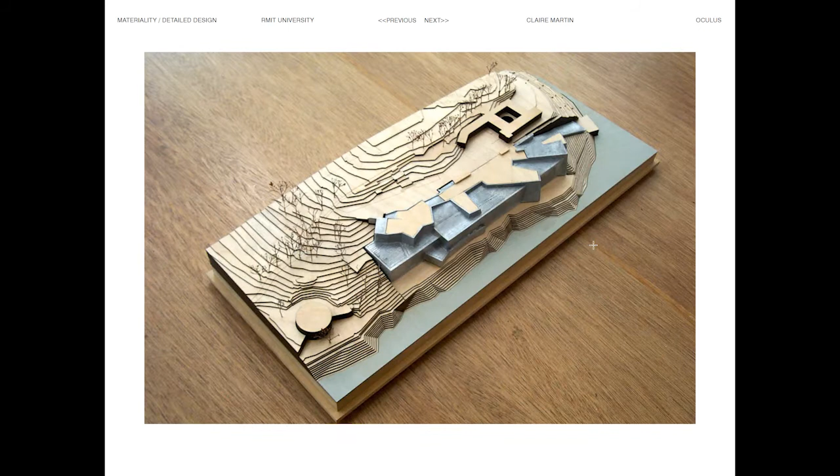I think in this instance, using monochromatic materials is about actually reinforcing the space and the relationship between the elements, not about saying that we will do everything in timber. So the choice of materials can be often about what you're intending to not communicate, as much as what you are communicating. There's a neutrality to the monochromatic way that we model that puts the emphasis on the spaces in between and not actually the objects themselves.

Just to show a scale, we did lots of these small scale models. I noticed that was at 1 to 10, so we'll do models 1 to 10 up to 1 to 1,000. We've done entire models of Docklands that we've had to design tables for. We've worked across lots of different scales, and obviously when you scale up your model making, you have to consider or reconsider the materials that you use.

You can see these are all quite neutral and they're quite rough as well. They're not really intended to be finished models. They're working models and they're detail models.

I also wanted to emphasize the importance of the materiality of site. It's easy, especially when you have a very accelerated pace to projects, to forget elements of the site, but it's really important to understand the materiality of the site you're working in. That's often to do with whether you're trying to better contextualize a building, extend an existing landscape condition, or actually use the materials that are locally sourced.

If you are doing concrete, if you are specifying paving, those materials should and will be brought from close to that area. Therefore, the materials that you're working with should reflect the places that you are working in, unless you are trying to do something deliberately dissonant, but that would be something you'd probably do as a one-off aspect and not everything. It's a pragmatic aspect, but it's also an important way of creating a sense of place.

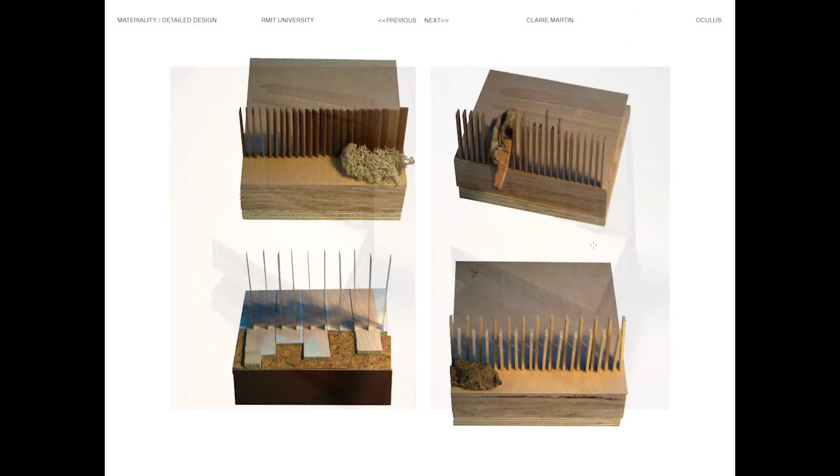These are more about, I guess, material testing, but it was more to do with scale models. These are models for the balustrades that were actually documented by FKA, but that we interrogated in order to see what the limitations structurally of the materials were, to help frame views and try and dissolve the boundaries as you look out over the water near Berriedale.

Again, using really simple and affordable materials like cork, monochromatic things, cardboard. These are looking at the ways that we could start to define the setup for the planting on the green roof.

We'll sometimes use Photoshop or Illustrator to actually overlay over physical models. I think the beauty of having invested time in a physical model is that you can photograph it in many ways and you can manipulate it in many ways.

You can cast light in different ways. Having a model is good because you take it to a meeting and people can get around it and get into the space. But it's also important to curate views of your model to actually convey what you want people to see, which is not always what they will see if it's left on a table.

It's a great opportunity to curate and perhaps use post-production techniques to alter those models. We used, I think the themes around Mona were sex and death. So we used the Egyptian Book of the Dead barcode, an abstract idea, to work out how to initially sow or set the planting, establishing the original grid for the green roof. That wasn't important for people to know, but it was important for us to have an organising device that was quite regimented and had a thematic reference back to the broader theme of the museum.

We were also using the fact that plant material doesn't always perform in the way you anticipate, and will eventually do its own thing. For us that was a vaguely interesting idea at that point. It looks more established now, but it's quite free range and a lot of the sedums have receded.

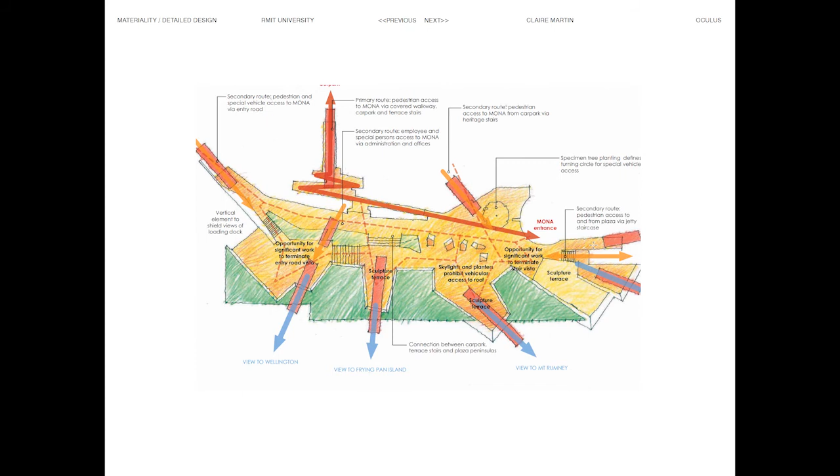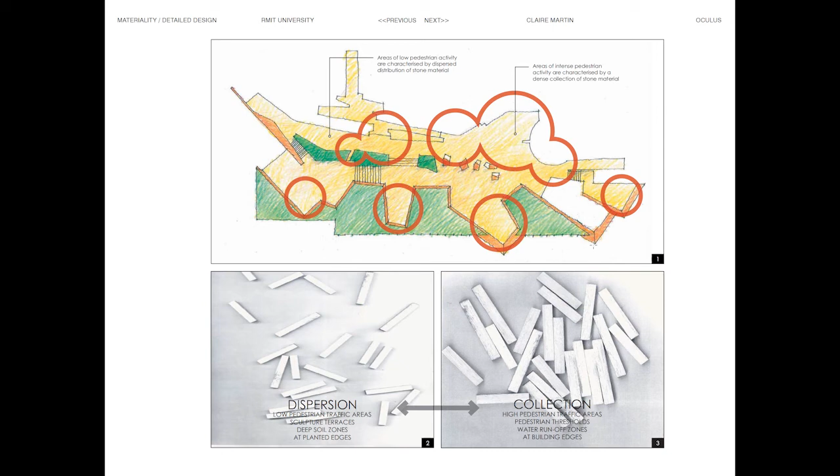The idea was trying to create points of intensity in what was essentially an open field condition. These are probably 30 centimetres by 30 centimetres, very small scale models that can be picked up and played with, but actually started to show how the material would perform. In this instance, say it's timber and plaster.

There are certain things about whether you can cast plaster between those elements that relate to whether you could cast concrete between those elements. We're not saying it's exactly the same, but there are certain performance aspects that would be quite similar in how we tested in that instance.

These were also about a similar size, but this is where, as part of your detail design work, you'd specify that you want samples produced, and those samples actually ended up proving that we were totally wrong and couldn't do what we wanted to do.

The idea was, this is some of the site source sandstone that ended up being too soft and broke. The idea was originally to have that integrated into the plaza, and then that was another local source stone that also didn't really perform as we anticipated. There would have also been lots of tripping issues, so it was good to test at a very small scale and then at a one-to-one prototype scale, as you were just discussing.

This was a model, not a particularly attractive model, but a useful one in that the element that's a sandy red colour in the middle was actually an insert. We had a base model that we could then insert different paving options into, which became quite a useful iterative tool. And then we looked at how we could create that idea of collection and dispersion.

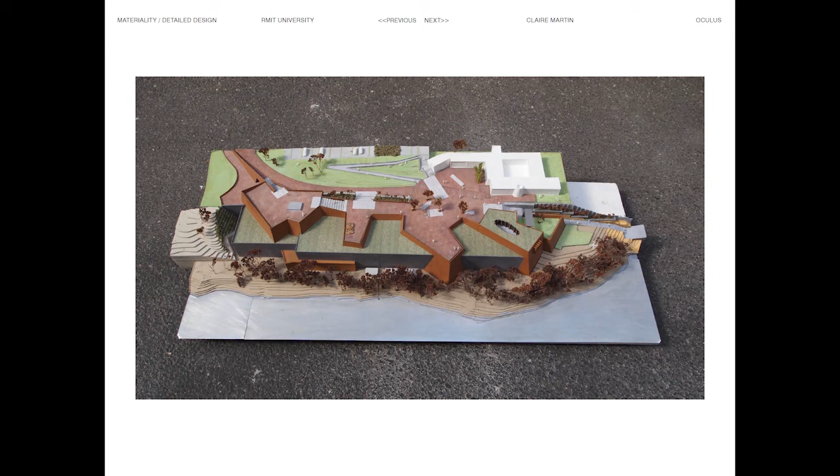These are literally cut out, inserted into the model, photographed, then pulled out and replaced with others. A pretty straightforward task, but at the same time we were doing that, we were also looking at it in one-to-one scale and understanding how it would perform and whether it would achieve what we wanted.

When you're looking at materiality, certainly in a ground plane condition, you need to think about reflectivity and the environmental implications of using light reflective surfaces, which in some instances can be really good and in some instances really bad if they're adjacent to buildings, for example.

I think we thought it seemed like a good idea at the time in terms of colour and change, and we ran through slides showing the idea of having pads that could preempt some of the artwork locations or congregation points. So we took him through all of that.

At the end of that, it really just kind of... you can see how many of these we did to test. At the end of the day, it's going to be a $3 or $4 million landscape, so obviously doing iterative testing at this scale is much better than building it and then seeing it doesn't work. Strangely, it's good for business as well.

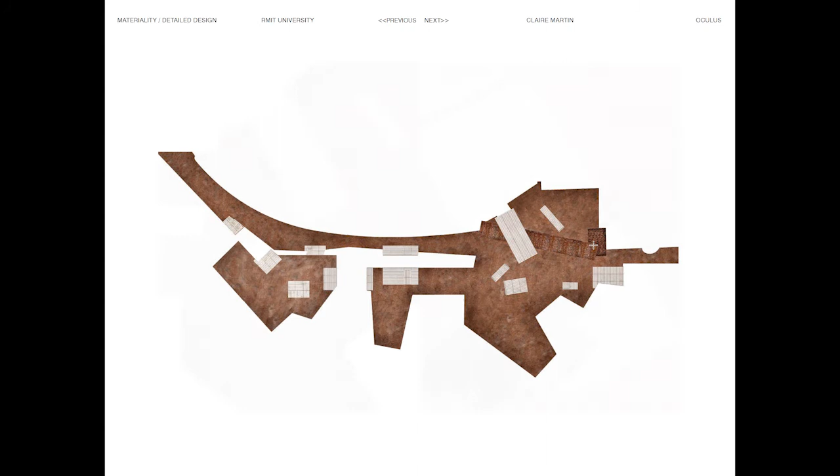I think he basically saw the red brick and decided that material reminded him of clay court tennis. He really likes clay court tennis, he likes tennis, and that's why now the plaza has a tennis court on it and doesn't have any of our ideas on it.

So I'm showing you that because there we have it. I think you just have to be careful when you bring people into your office. But yes, there's something that resonated with him about that materiality, and he made a totally different connection with it, which is ultimately a lot to do with our spatial intelligence. We draw on what we know from our childhood, what we enjoy, what we like, and his understanding of that was very different to ours. But at the end of the day, he does play tennis there, and I think it's quite a playful thing.

Ultimately, this project, whilst it's a very public project, is actually the biggest private gallery in Australia, and that's ultimately one of his homes as well.

This slide was referring back to the life, death and sex idea within the gallery. So again, just talking about plant materials. I think the plant material is reasonably subtle and not overly extensive, at least in the plaza. But the idea was using plant material that resonated with evergreen, the idea of everlasting, or the idea of cemeteries and memorials, which often use that type of planting. So it was understanding that plant material can have its own symbolism, often to do with colour and change.

So there are cherries throughout the plaza and the stair, which is to do with spring.

These pictures show an open lawn condition, essentially a park, almost like an urban parkland setting, although the entire NGV garden is on a suspended rooftop. So it is a very successful green roof. And then some of the sculptures that were there. I think it was a very restrained and pared back material palette, which complements the pared back nature of the facade.

So I think when we got involved, these are the structural drawings which show where you could actually locate trees within those green blocks. Lots of structural constraints. So all of the trees that you see there are on structures—some are in containerized tanking, and some in shallow profiles and build up.

These are the original Arup, Sinatra Murphy, the original landscape architects who worked on the renovation, which was in the early 2000s. These interesting figures show lots of hedges. I think a lot of our work is either about stopping things being built, getting things built, or sometimes it's about removing things as uses change.

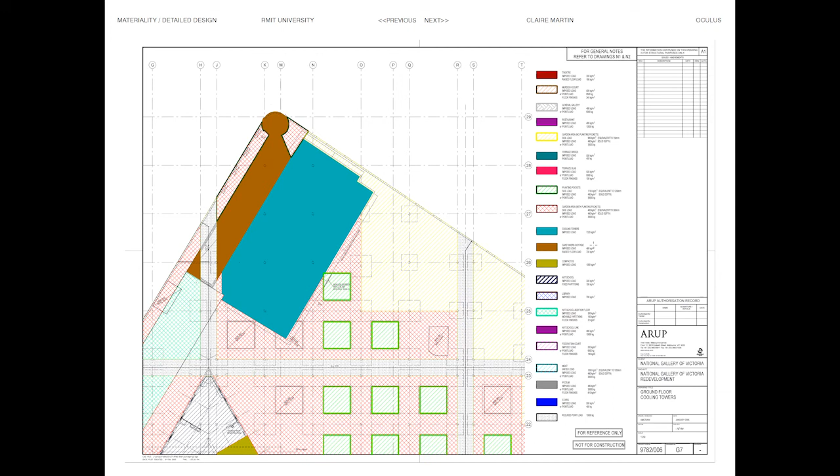These are very early sketches, but the first observation was understanding that the materiality of the forecourt outside the Great Hall actually prevented people from going outside. So I think we came up with the idea of putting down that synthetic turf that's there now, which was meant to be temporary, but like many temporary things, has not gone yet.

The idea was that sometimes that space is perfect functionally, but it's so glary that it actually stopped people going out. So you need to understand the power of material properties and that they can actually prevent use, which in that instance was obviously a problem.

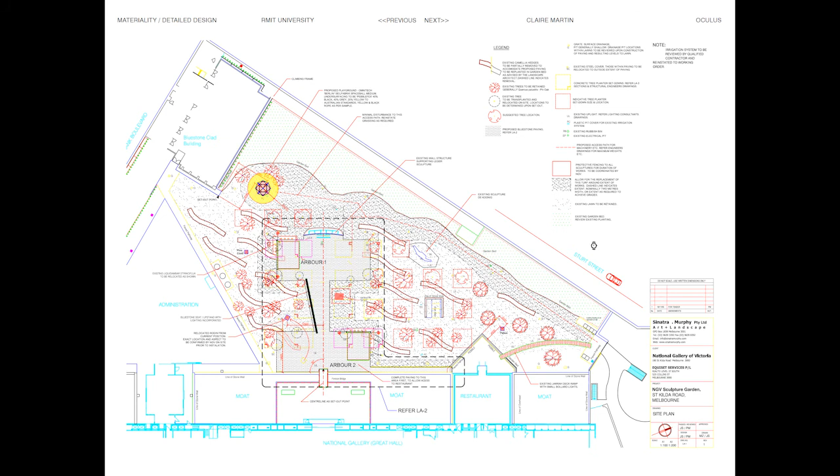These are just really early, very simple studies about how you could remove things to increase circulation—really about removing the hedges. What we've almost done is return it back to what it was before, but the way we modified it has created zones.

We had to work with some of the beds that had been created as part of a temporary exhibition, and I worked with Robyn Barlow, a good friend of mine and an RMIT alumni and landscape architect, looking at perennial borders, which are quite topical. Again, trying to understand how the landscape we were manipulating sits in the context of a gallery that is ultimately a representation of cultural production now, which is obviously art and design.

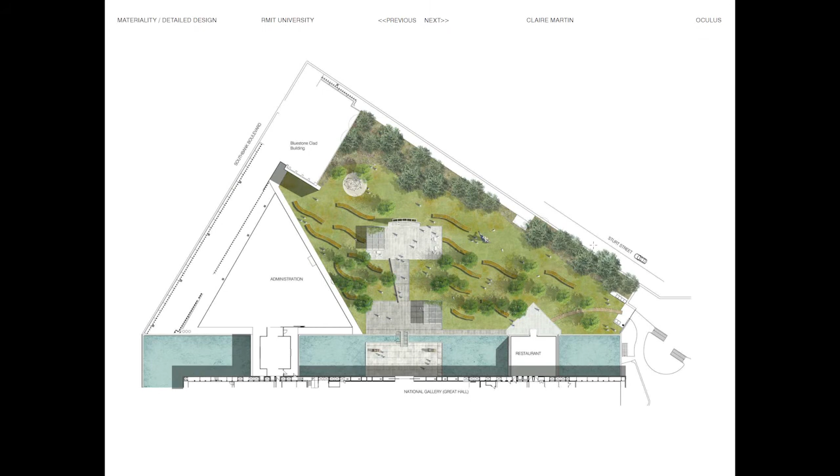Ultimately what we were doing is creating more space for people, and that flexibility is becoming increasingly important in gallery contexts. This isn't really about materiality, but it is about space, and using very simple techniques to convey to a client to do something. We didn't really even do proper construction drawings for a lot of the things that happened there—it's done much more like an event or an exhibition.

So these are done by somebody who's an intern with us. And then these are just the planting plans.

I think if you consider planting as a material, one of the things we, like many firms, are looking at is the use of Revit in our office. At the moment, if you try to put planting into Revit, you lay it out like a carpet finish. There's lots of limitations to using Revit for landscape, and we're still playing with that a little bit.

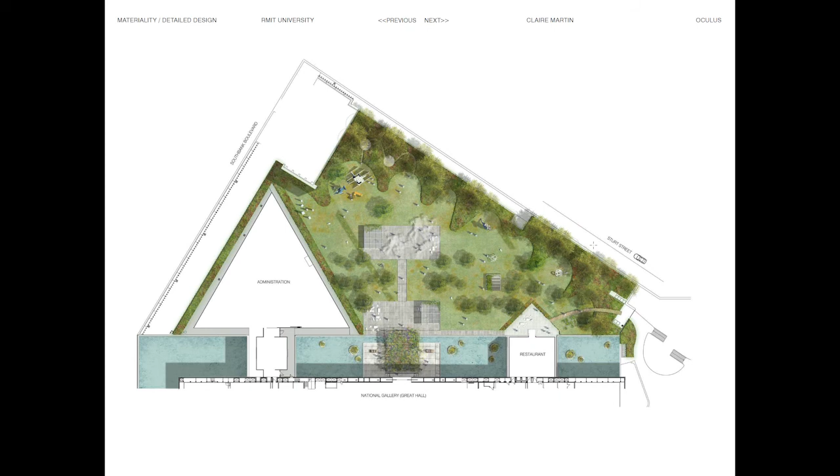But I think there's actually nothing better than doing a really good hand-drawn sketch to understand how the planting will work together, actually having it built, then going back to see how it performs and modifying it. So instead of paying us lots of money for documentation they probably didn't need to build it, we could spend time establishing a relationship with the garden and ensuring the landscape succeeds.

So that's trying to understand that materiality is still spatial in terms of texture, structure, and colour, and that landscape architects are increasingly engaging in a more successful way with planting. It's probably not always been a strength in our office, but it's something we're increasingly collaborating on to emphasise that it's integral to our design, not just ancillary. And then starting to understand how these things sit in a bigger context from a material perspective.

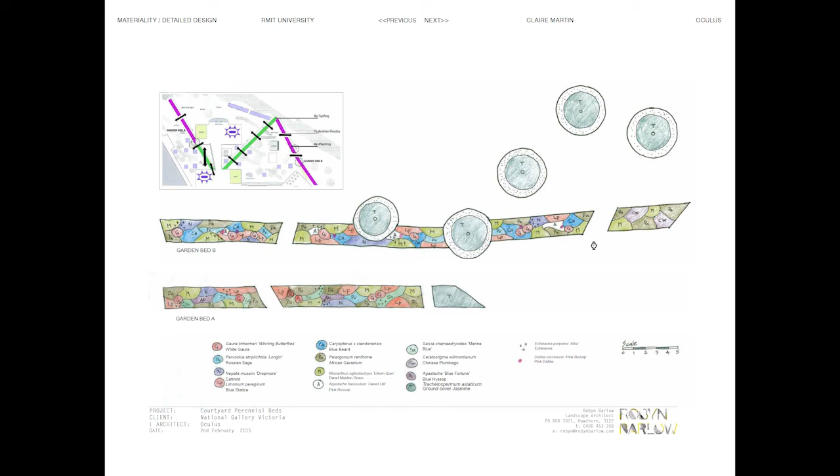So I think it's really, in a different context before I came here, about how what we design is sometimes not to see the design. What we've done is little tiny changes that are actually quite intangible - people probably can't remember there were hedges there before.

But what it has allowed the landscape to do is support events, support programs. It's actually allowed the NGV to become exceptionally successful and seek significant state government funding. So those little tiny things can totally change the way infrastructure and spaces are used, which is exceptionally valuable.

Anyway, these ones are more - trying to show very quick before and after, probably not as much to do with detailed design, but trying to show that materiality is as much about planting as it is about hard structure, and it is about texture.

Very quick things were done - not to say it was cheap, the Veggie Garden cost $100,000 - but it was all about using very beautiful cypress that would take on a black stain. That was a really simple device to actually create a boundary, define the space, and more successfully extend the restaurant program into the garden.

The restaurant's now been renamed the Garden. The produce grown there is used by the chefs as part of educating them, and also with children's tours. It's also about the idea that galleries increasingly have to reflect what people are doing at home. So there's an intimacy and domesticity to what was done here - it ties into bigger cultural shifts.

And then it becomes part of their portfolio - the NGV represents the interests of architecture and design, and landscape architecture sits within that.

And then again, using model making to communicate some of those things, which ultimately some got built and some didn't. But there's a tactility to the model making which suggests we're trying to establish an intimacy in that garden - it's obviously a scale model, but there's something about our attitude to the model that's also representative of our attitude towards the garden itself.

I've included these photos because we get the opportunity to visit lots of the projects we do if they're public. Not all our projects are public, but we do keep an eye on what people are doing on Instagram, in terms of how people use our projects in a way we intended or didn't intend.

I think it's part of the post-occupancy evaluation idea - some of that can be done formally and some informally. Using observation, ideally in person but otherwise through perving on people's social media, is a good way of looking at how your designs work or don't work. And sometimes they work in a surprising way.

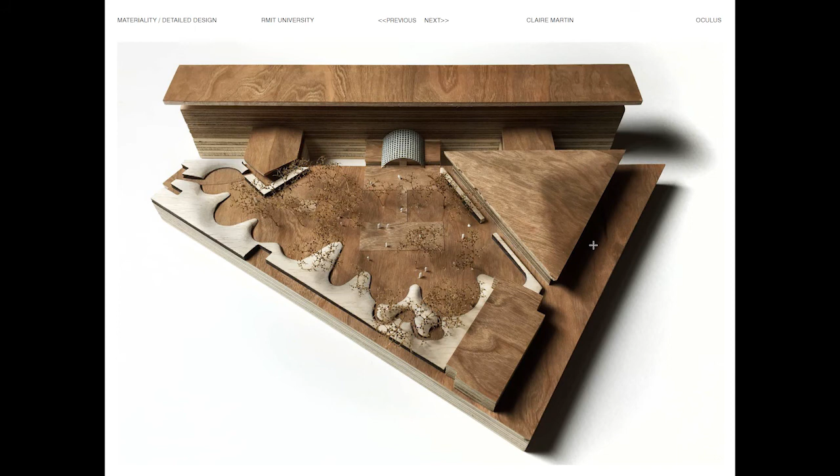I've temporarily forgotten this man's name, Bryce Mortlock. He did the master plan for the Melbourne School of Design, which we worked on for a few years with John Wardle Architects and NADAAA from Boston.

He was obsessed with brick as a material. University of Melbourne is very contrasting in its campus design to RMIT, for example, which is a city campus. There's a really strong material palette there, which gives a lot of cohesion to that campus, and that has continued over the decades.

These are very early sketches of which we didn't do thousands, but quite a few. Again, you can see there's a neutrality and a material consistency even in these Photoshop renders. If there's a simplicity to the material palette, it can often draw your eye to other elements, the same way they talk about in model making.

For us, it was always about creating a love letter to brick. We continued the brick theme as was required, but also tried to understand how we could interpret it laterally. This was a model we made for the architects to help better understand the relationship of the building to the landscape, and essentially a sort of delaminating ground plane.

Physical model making is useful for testing topography. There are more machinic ways of doing that, but we often will have buildings that you can pull out of our work as well. It's important to understand, in particular, the relationship of the ground plane. We're not always so interested in the facade.

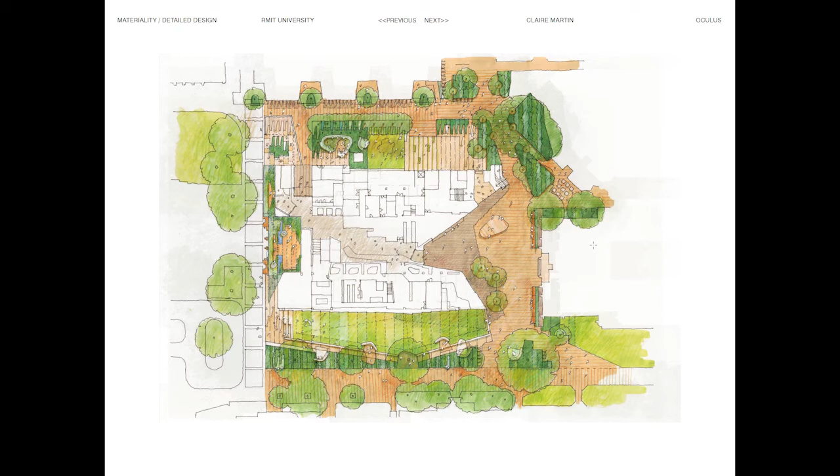Again, we use different photographic techniques and angles to convey different aspects of the design. It's a slightly strange render, but we do use lots of digital rendering techniques. A lot of what you can construct digitally isn't always going to tell you what you can do physically, especially if you play around too much in Rhino, but it's helpful in terms of the constituent parts you'll need to conceive of something actually standing up.

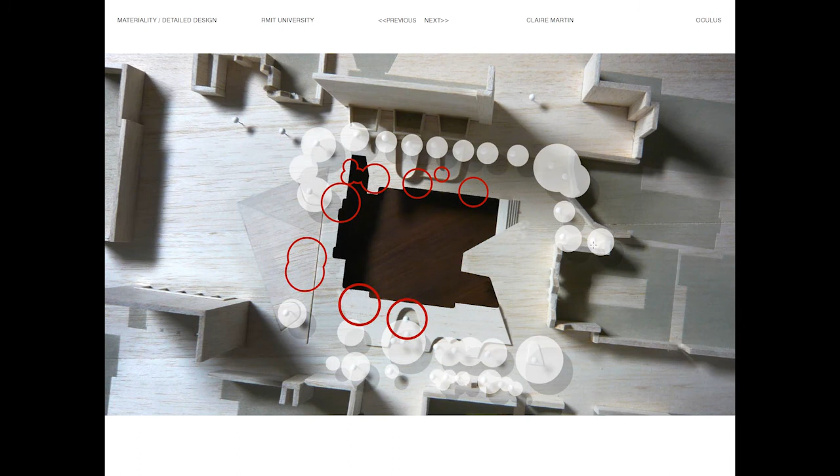We had almost like a little internal competition, and a few people designed different brick seating elements. In the end the first one I showed you was the only one that was built. It's a pretty literal translation of that digital model to get it built, but it did require input from a very good bricklayer.

So simple - it's just that thing of taking the material for a walk and using it in applications not necessarily used elsewhere on campus. It was also based on our observation that a lot of students weren't actually sitting on seats, they were sitting on low walls. So a lot of our approach to integrating places for people to sit is often about the context we create, not just inserting furniture elements.

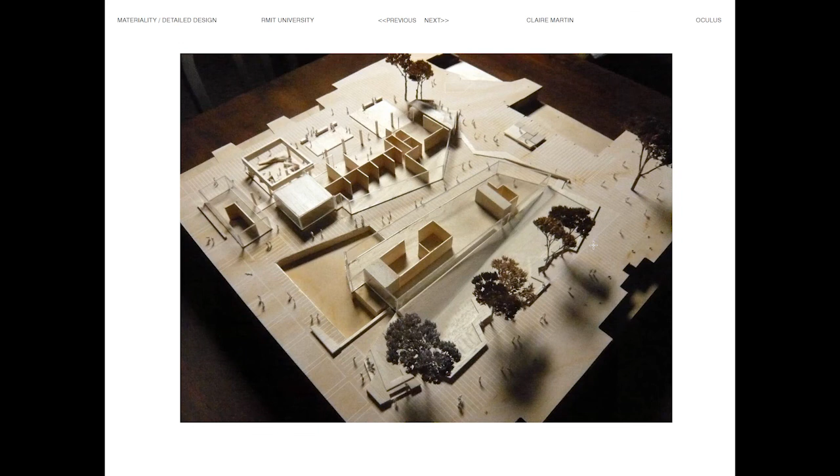We often look at proxemics and the spatial relationships between people - the idea of interpersonal communication, whether it's personal, intimate, social or public. There are very particular distances that people sit between each other, and that can be supported by the landscape. And then, where we got a little bit crazy with the bricks...

In the end, the white brick we used, much to our distress, failed. We specified a particular brick, and at the 11th hour that brick was substituted due to lack of availability. Melbourne School of Design was actually delivered ahead of time, successfully delivered by a builder who got paid a large incentive to do that.

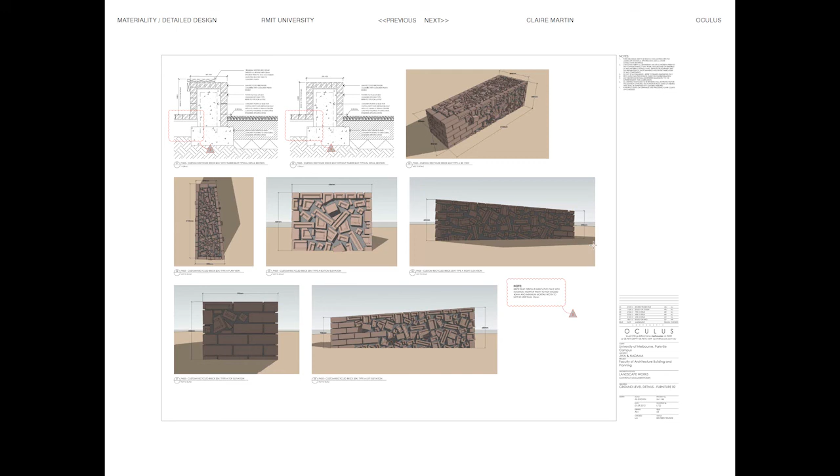But that puts a lot of pressure on the contractors and on the people who documented it - in terms of site supervision and approvals, it accelerates the process, so it comes with a lot of risk. In hindsight, we approved, probably wrongly, a substitution because we were put in a position with very little alternative, and in the end that white brick failed in that application.

So I think there are serious implications for products failing and our specifications failing, but in the end I think we resolved that to everybody's satisfaction. But I think we have contractual obligations to ensure that our designs succeed and that they meet our design intent and the expectations of the client, and also to make sure that they're safe.

So I think things like slipping and tripping, things that sound horribly dull, are actually really important, and often that is to do with material selection. People are also very easy to dismiss material failure because of things like maintenance, but often it can be anything to do with the way that you originally sourced something, specified something, detailed something, and then went on to maintain it. So we are responsible for all of those phases up to a point where contractually we're no longer responsible, but you have to try and outline an intent for maintenance, in particular for the maintenance of materials.

And then I just included this one because I still think it's one of our simplest models. The idea was to literally have a planter bed that was an inclined plane that would face back to the dean's office, which is a private dean's terrace, only accessible to the dean and his or her guests. That was digitally modelled, and then it was simple as actually trying to understand what materials could basically support a lightweight substrate structure and have that sort of elegance in being quite a thin fold.

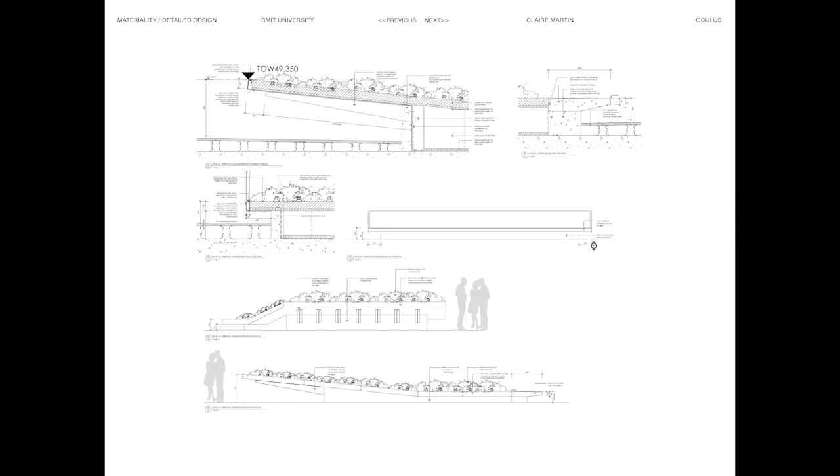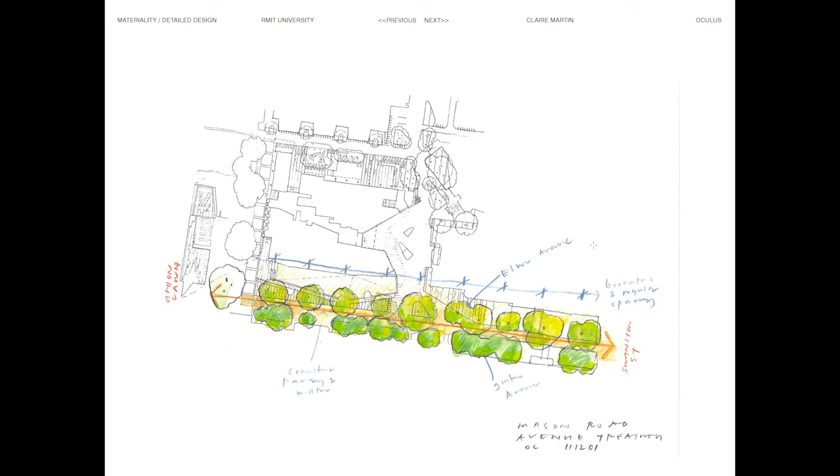And then that sort of went through various digital processes, and working with the architects on obviously the folding of their building and the glazing and the mullions, and then trying to work within standards for fall heights and understanding the constraints of precast dimensions. So that was in the end a precast concrete edge.

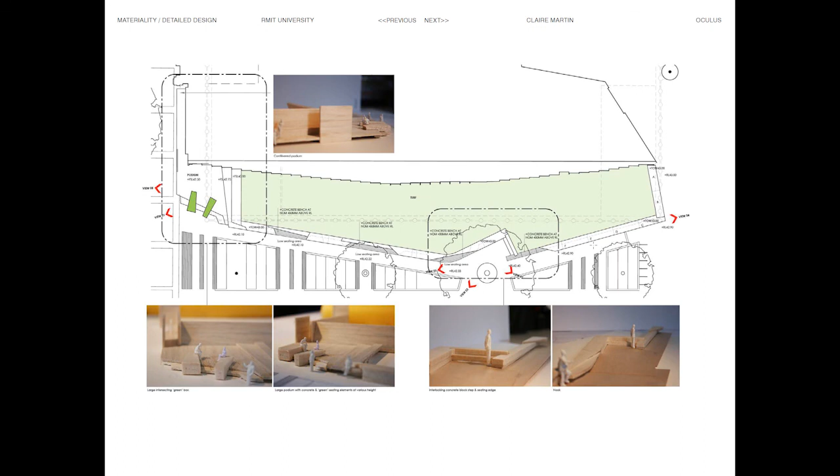So I think we will often work between digital models and physical models, between Revit and Rhino, and increasingly Lumion. And then these are just what would constitute more detailed design drawings. I think these start to show that we would still at this point generally only issue CAD drawings and do not at this point issue Revit models as part of BIM, which is Building Information Modelling. But we will give people our digital models, at their risk.

So you might do a digital model which tests the idea and then document it in CAD, which is what you're contractually obliged to do at this point, and then hand that over to a structural engineer who will put it through their models, and then they may send it to a fabricator. But again, it's at their risk as it's not a contractual model. So that would have gone through lots of iterative processes, and we would have tweaked our drawings before a construction issue to ensure that they could be fabricated.

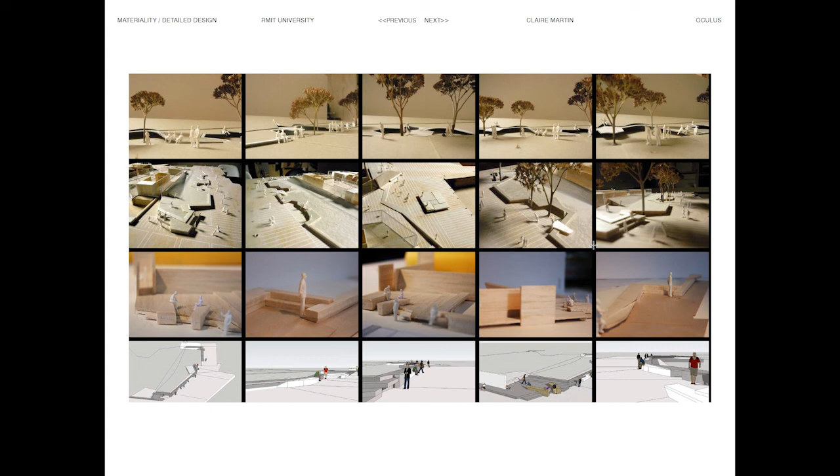So even if your drawings are 100%, there could still be issues, a construction issue, issues that are discovered through the shop drawing process, and the shop drawing process is also part of the engineering certification process. So you can see how complex that is, very simple to model in Rhino and balsa wood, edge, and then obviously the fabrication on site, which combines in situ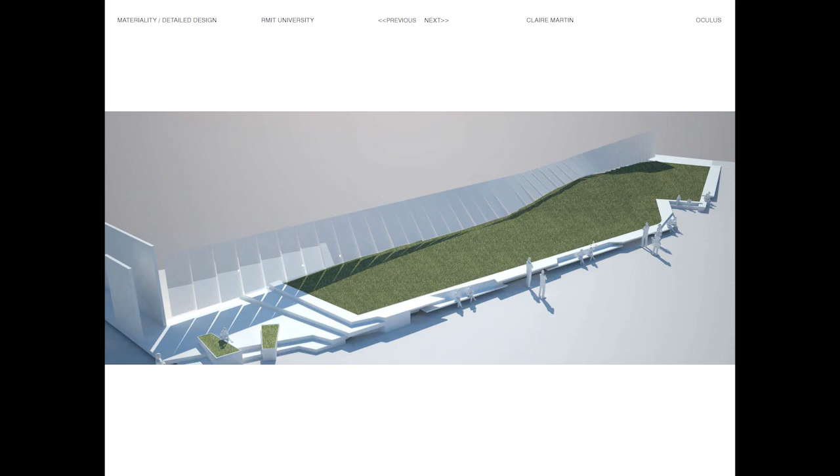concrete pours with then precast elements. And I think there were lots and lots of issues with this in terms of some of the levels not being what we understood them to be at the time, and so some major changes that had to occur, and then just showing that through the construction process.

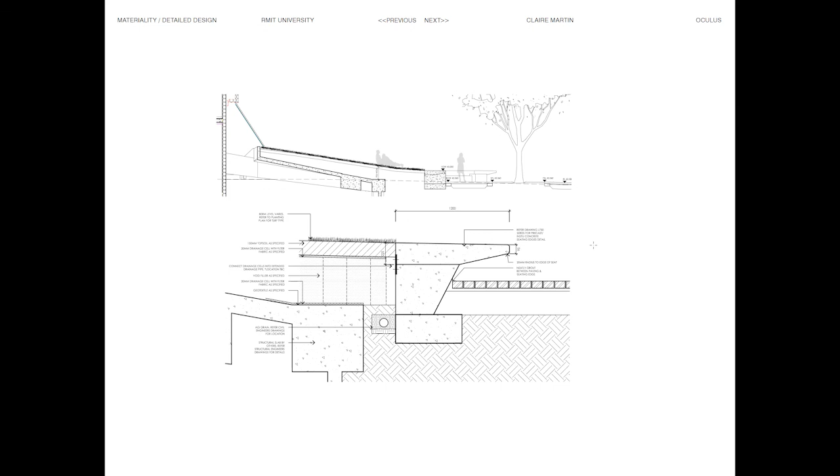But from there you can hardly see that edge, but it does support a lot of occupation, and it does, I guess, protect the trees, and it also establishes a new relationship between the buildings. And I think that's the last image.

And I think we basically tried to involve everybody in the office going out to the Melbourne School of Design and seeing essentially what worked and what didn't work. That was anything from collecting leaves to interviewing people about the performance of plants to actually observing where people sat. And I think that's what I'm saying about using informal post-occupancy observation to actually inform your design.

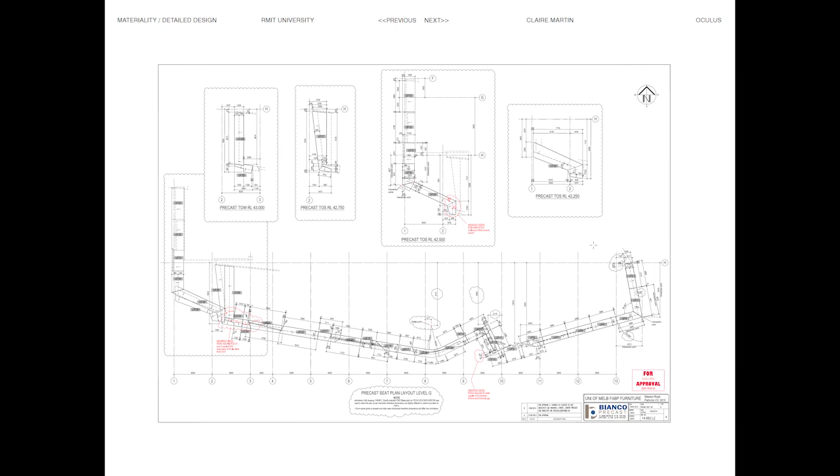So there's lots of things that we know as a practice that we wouldn't do again, not just because of the exhibition, but just because we have a lot more experience, techniques change, and so I think practice should be a constantly reflective thing. You can't, it can take 3 years to get something built or longer, so there's lots of things that by the time they get built, you wouldn't necessarily even do them like that.

So there's lots of things you are constantly learning, or should be constantly learning, that should inform your design. We do increasingly try and spend a lot of time observing how people use spaces before we modify them, and how people use them afterwards, and are quite honest in the office about that. And that's it, just over.

Is this where I say any questions or comments? I'm open to comments.

When you came to going through people's social media accounts and seeing how they use the site, were there any images that surprised you in a good way?

Yes, different parts of their social media accounts. I think some of them are literally following things like University of Melbourne, or NGV, so they're institutional ones, which could be slightly more manipulated for marketing purposes. I think Melbourne Uni's ones are all about individuals who attend or visit Melbourne Uni posting. Occasionally, not too much.